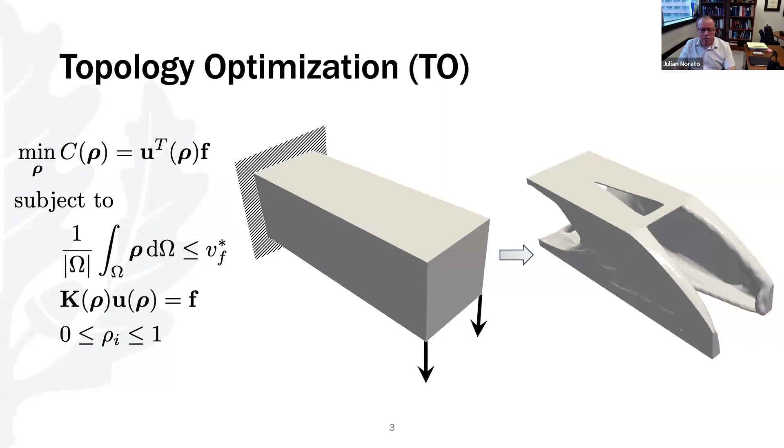I hope most of you are familiar with topology optimization, but if not, it's a set of techniques to optimally distribute material within some prescribed design region. Optimally means in terms of an optimization problem minimizing some function of interest subject to some constraint. Typically, the goal is lightweight design, so one function quantifies the amount of material, and the other is typically a function of structural performance that requires solving a partial differential equation, typically through the finite element method.

Prevalent techniques in topology optimization, most represented in the literature and commercial software, use a field representation. The most popular are density-based methods, with element-wise densities that dictate whether there is material or not in the design, and the level set method, where the boundaries of the structure are given by the zero level set of some function, with values typically associated with nodal values in the finite element mesh. In both cases, we have a field representation discretized using the finite element mesh, so the way we represent the design is tied to the mesh we use for solving the PDE.

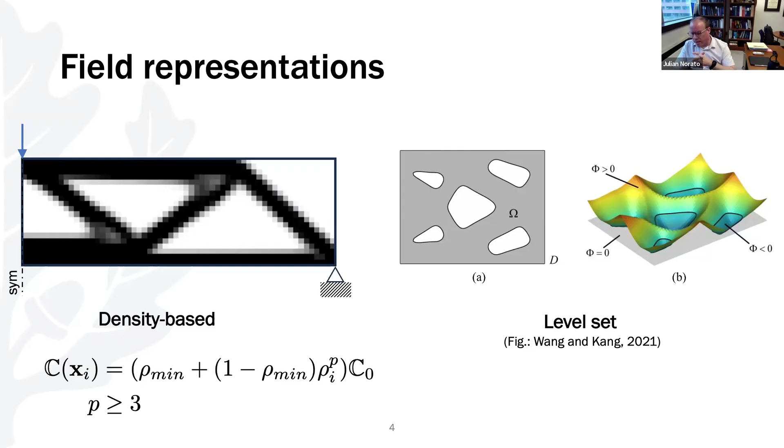Geometry projection, the set of techniques I'll talk about today, is different from these field representations in that the structure is described by a combination of geometric primitives, typically simple ones like a bar. Unlike density-based and level set methods, where design variables are element densities or nodal values of a level set function, in geometry projection the design parameters are geometric parameters directly associated with the dimensions, position, and orientation of these primitives. For instance, for a bar, the design variables could be the positions in space of the endpoints of its axis and its width.

The idea of the geometry projection is to have a differentiable map between these geometric parameters and a field representation like the density representation. We want to create that map because we want to retain the significant advantage that field representations have: any time the design changes, you don't have to remesh or recreate the mesh. That's a huge advantage. We want this mapping to be differentiable because we want to use efficient gradient-based methods for optimization, since those are the ones we use most in structural optimization—they're the most efficient and require the fewest function evaluations.

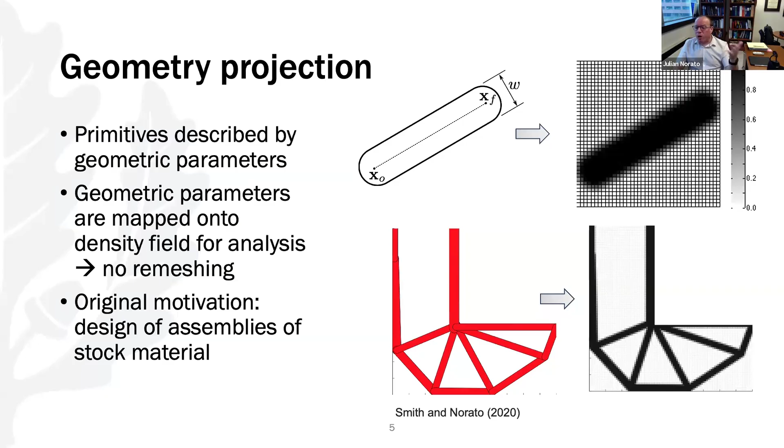The original motivation of these geometry projection techniques, going back to my industry experience, was to design structures made of assemblies of geometric primitives. However, as I'll show today, over time we realized that this representation of the structure opens up quite a bit of other opportunities to solve problems that cannot easily be solved with field representations.

So how does the geometry projection work? We have the parametric representation I mentioned—for instance, the design variables here would be the positions of the endpoints of the axis and the radius of this bar. We also have this membership variable, which I'll talk about more in a minute: essentially, if it is 0, it means we're removing the bar entirely, and if it's 1, the optimizer is telling us we need to keep the bar. To obtain what we call a projected density for one of these primitives, the first thing we do is compute the signed distance from a point to the boundary of the primitive.

For certain geometric representations, what we call an offset solid, all points on the surface of this solid are equidistant from the medial axis. For these kinds of representations, it's very easy and fast to compute the signed distance—we actually have closed form expressions for the signed distance as a function of the geometric parameters.

Once we have that signed distance, we pass it through what is a Heaviside, or smooth regularized Heaviside function, to give us our density. So for instance, if we have a point X such that some window around that point does not intersect the primitive, the density you get is 0. If you have a point inside the primitive, and a window containing that point is entirely contained inside the bar, then the signed distance is larger in magnitude than the radius of that window, so we end up with a density of 1. Finally, if a point's signed distance is smaller in magnitude than the radius of the sampling window, we get an intermediate value of the density.

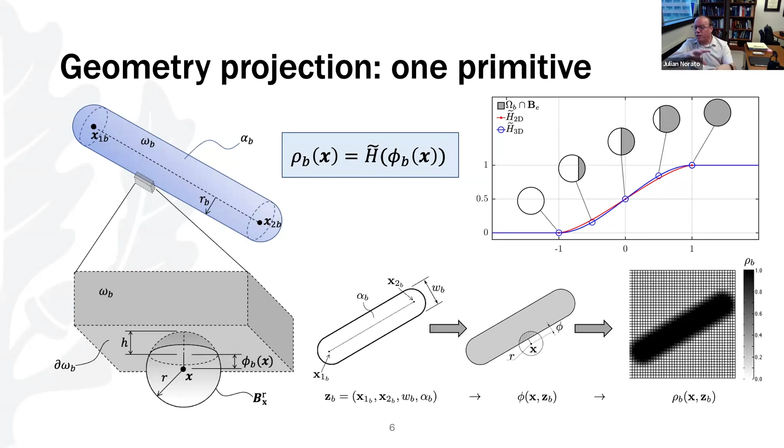Not only that, but the fact that we have a density representation of this primitive means, just like in density-based methods, that this primitive can be completely disconnected from the rest of the structure—and that is fine, because the void region has some small, negligible but non-zero stiffness. So the optimization has the capability of having these primitives float until they end up connected to other parts of the structure during the optimization.

Now, the membership variable I was talking about multiplies the projected density I just described, and then we raise it to a power p. This is very much like the SIMP penalization in density-based methods, and it has exactly the same effect: it penalizes intermediate values of that membership variable. That's because, as you'll see in a minute, we use this effective density to define the material properties, so that regions of the design space with an intermediate value of this density are poor in terms of stiffness-to-weight ratio.

Then the optimization will push these primitives—it'll push these membership variables to be either 0 or 1. That's what the penalization does. This is very advantageous because it means that regardless of the dimensions, position, and orientation of a primitive, the optimizer can remove that primitive simply by making the membership variable 0.

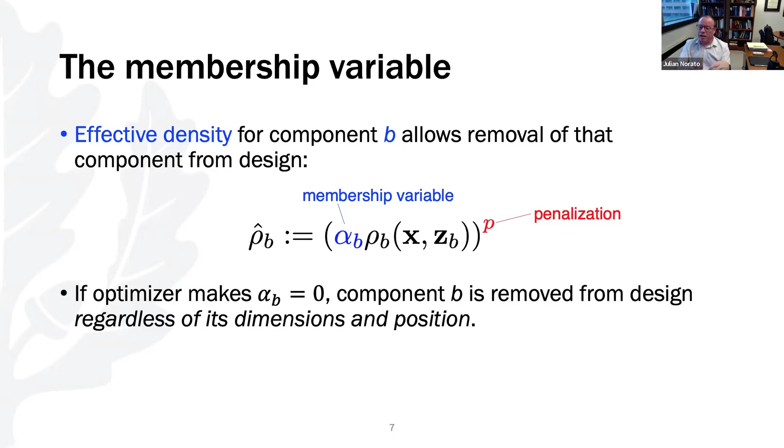This is not possible in the other major technique for feature mapping topology optimization, which is the method of moving morphable components. The MMC does not have this feature. So in MMC, to be able to remove a primitive, it's necessary that that primitive either hides behind another primitive or that it becomes so small that it has no effect on the analysis.

What I just described is for a single primitive. When we have multiple primitives, we can have two situations. One is when all the primitives are made of the same isotropic material. When that is the case, we can combine all of the primitives using a modified p-norm. We take the effective densities for all of the bars or primitives, and the p-norm, as you may recall, is an approximation of the maximum function. So wherever they intersect, you're essentially getting the maximum of all the effective densities of all the bars at that point, which is essentially a Boolean union of solids.

In parts of the design region where there is no primitive, a point that does not intersect any of the primitives will have an effective density of 0 for all of the primitives, so this whole term is 0. You get rho min to the p. If you take the p root, you just get rho min. And so in that way, you essentially have a low stiffness material in the void region.

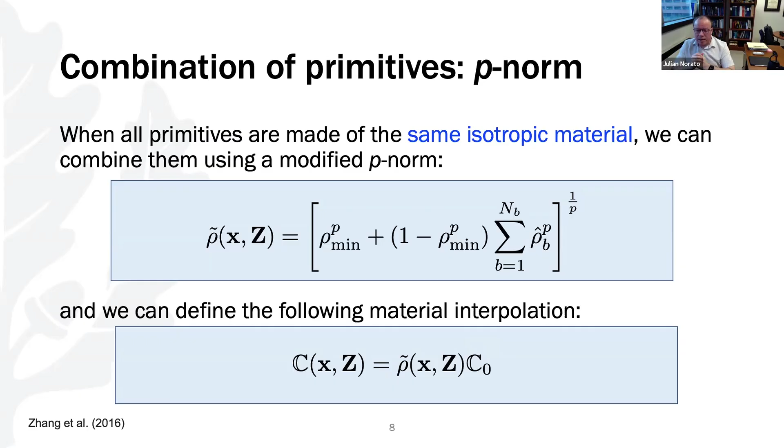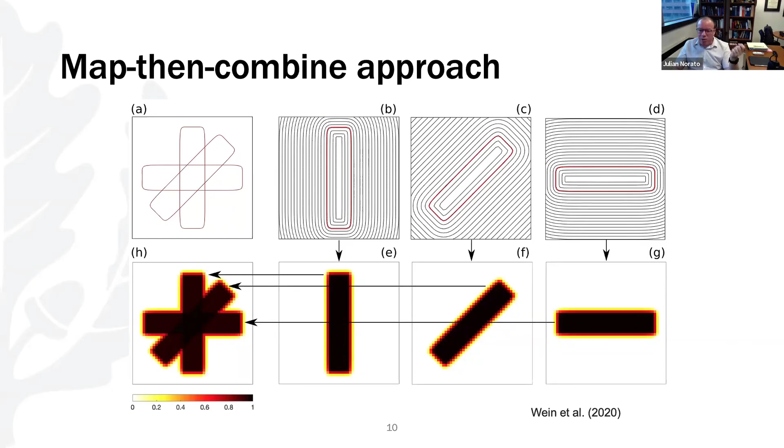The geometry projection is what we called in this review paper a map-then-combine approach, in which first you do the mapping for each one of these primitives, meaning you obtain a density field for each primitive, and then you combine the density fields. The opposite approach, which we call combine-and-map, adopted by the MMC method, is that first all of the primitives are combined into a single geometric representation, and then they are mapped onto the mesh for analysis. In principle, they may look like at the end of the day they'd be the same, but the difference comes from the membership variable I was talking about.

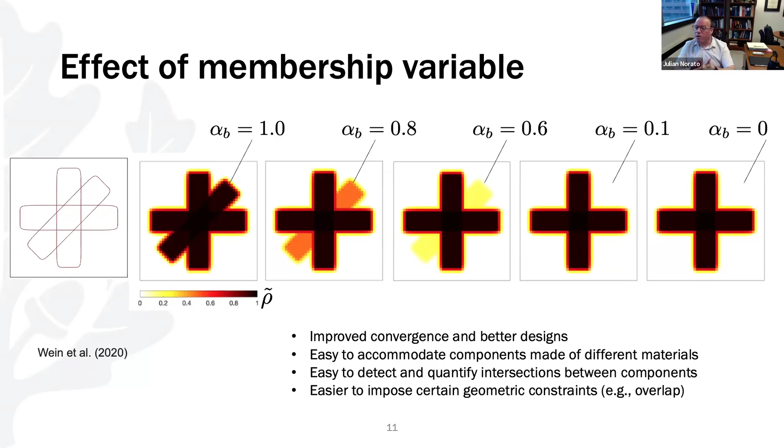As it turns out, it also makes it very easy to accommodate components made of different materials, and we've used it for that purpose - to detect and quantify intersections between components, and we've also done that. And it makes it easier to impose certain geometric constraints. For example, if you want to prevent certain kinds of overlaps, it's easier to do it when you have a separate density field for each one of the bars.

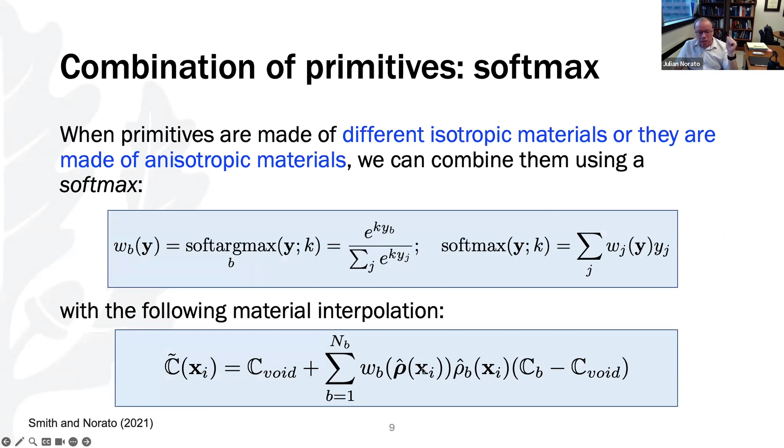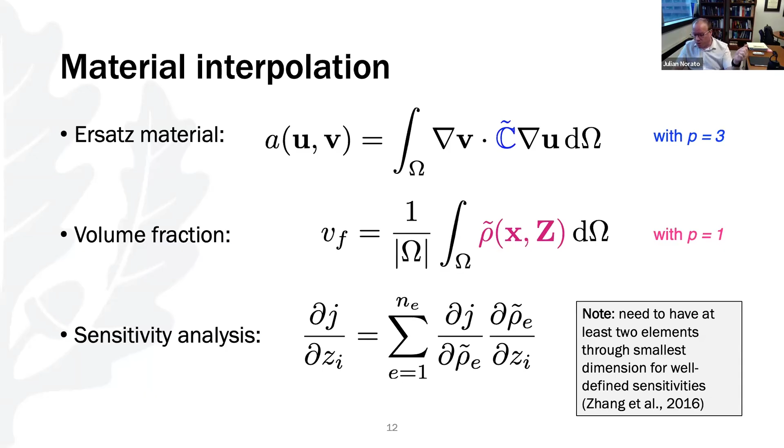We have shown that to be able to have well-defined sensitivities always, it is necessary to have at least two elements through the smallest dimension of the geometric primitive. Not only that, but in general, to correctly capture, for example, the bending of the primitive, it's good to have at least two elements, if not more, through the smallest dimension of the primitive.

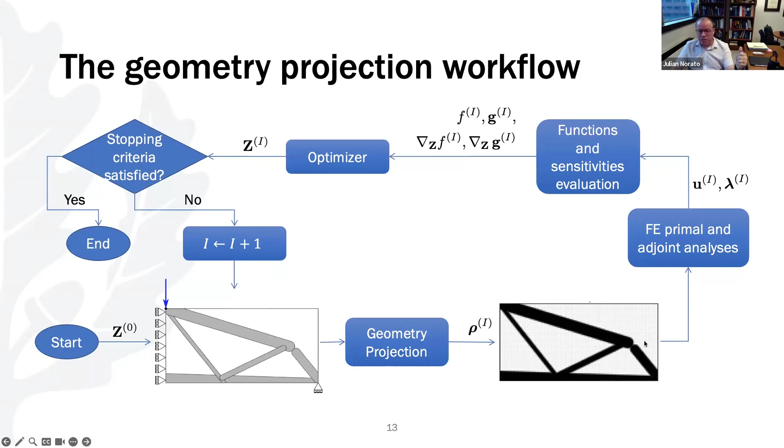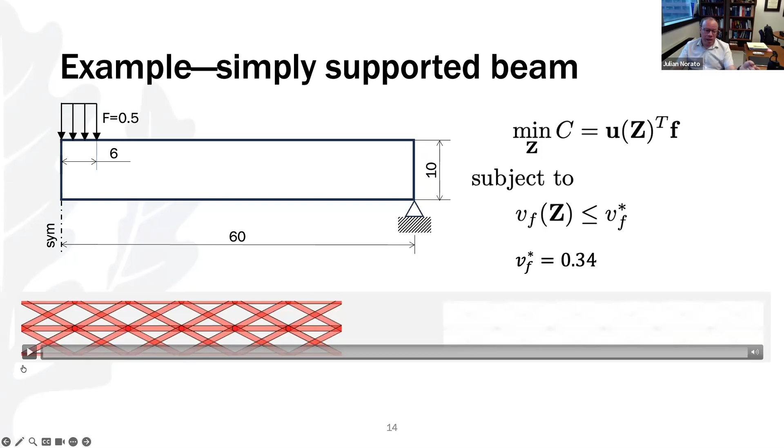And what you see on the right-hand side is the projected, or the combined, density. You see during the optimization that some of the bars are being entirely removed, like this one, for example, it disappears, and this one too. And that's really the advantage of the membership variable.

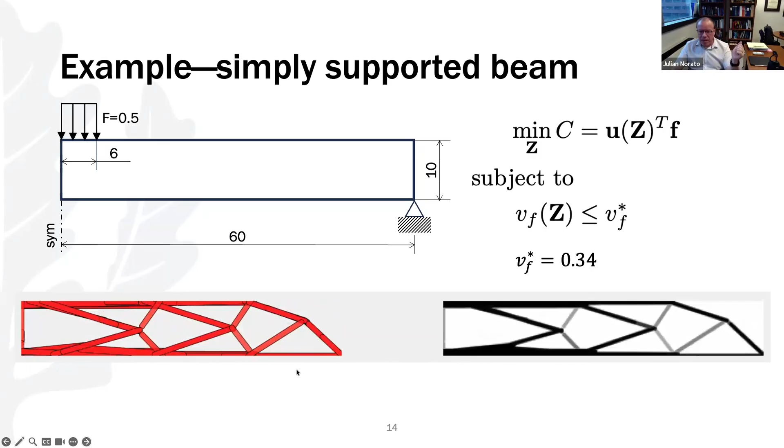So with that, let me get to the application of geometry projection techniques to large-scale problems. Let me preface this by saying that obviously density-based and level set methods have been very, very successful in solving a very wide range of problems in topology optimization. But the problems that I'm going to talk about here are problems for which trying to do the solution with field representations would be very, very expensive. By taking advantage of some of the characteristics of geometry projection methods, we can solve these problems in a much easier way than what would be possible with, say, density-based and level set methods.

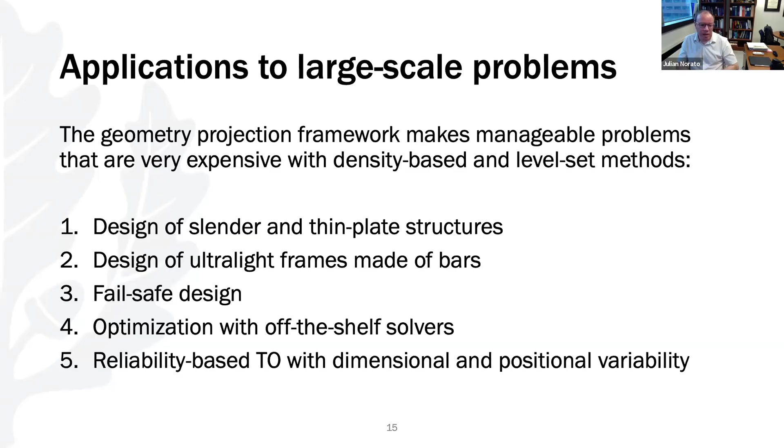So let me start with the design of slender and thin plate structures. One of the first applications that we made of plate structures was actually motivated by my previous industry experience in the heavy machinery industry at Caterpillar, where we were trying to design these structures made of plates. So in this case, the primitives are plates.

And so the initial design looks like this. The plates are just collapsed to a sphere. As the optimization progresses, you see that we obtain a design that is made exclusively of these plates. And this is great, because this looks a lot more like something that we can make out of, let's say, welded plates than what we would get out of density-based topology optimization.

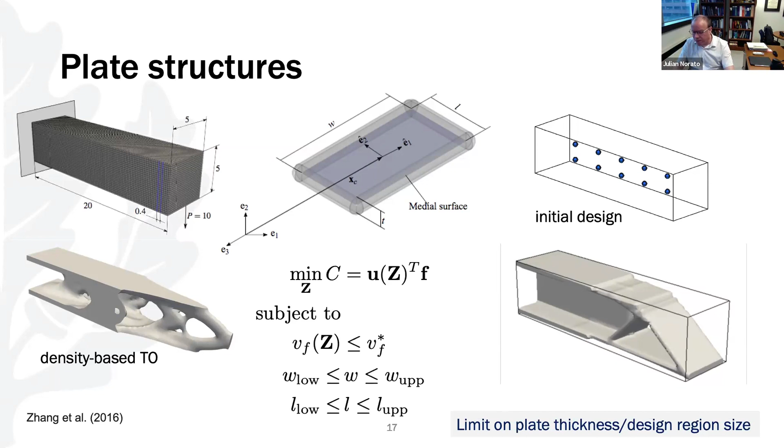However, this still has a limitation, and it is that because we need at least two elements through the thickness of the plate, there is a limit on how thin the plates can be relative to the design region. Because if we have very thin plates relative to the design region, then the number of elements that we would require for the finite element mesh would be huge, and it becomes impractical at some point. So the first solution that we put forward to try to address this problem was using adaptive mesh refinement.

Just like the name says, the idea is to refine the mesh so that it has smaller elements near the boundaries and coarser elements elsewhere.

The advantage of the geometry projection here is that the projected density, or signed distance, provides a very easy way to have a refinement indicator.

So you compute your geometry projection on a coarse mesh, and wherever you have elements that have intermediate values of the projected density, you mark those elements for refinement. Then you do the refinement, and you can repeat that for as many levels as you want.

You again repeat the geometry projection, look at the elements that have intermediate values of the density, mark those for refinement, refine the mesh, and so on.

This is very convenient for two reasons. One is that, unlike common methods to do adaptive mesh refinement which are based on some gradient of the solution and are significantly more involved...

...this is purely based on the geometry. So it's very easy, very quick to do, and it does not require a finite element analysis.

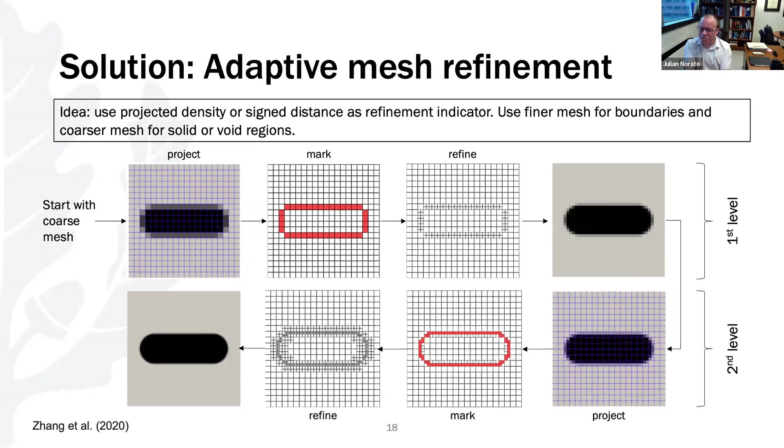Whereas if you were to do something similar in density-based and level set methods, you have to deal with the fact that you're using the mesh to describe your structure, but then you refine it—so essentially you're also changing the description of your structure, and that introduces difficulties.

This is a small example in which we're trying to design a simply supported beam, shown here just so you get a glimpse of how the adaptive mesh refinement is working.

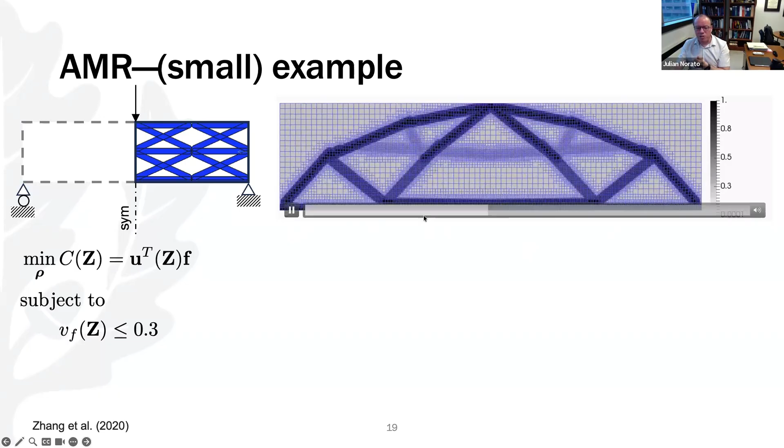The optimization is essentially creating a coarse mesh in the void regions, and this is done at every iteration of the optimization, as you can see—so you repeat the adaptive mesh refinement at every iteration.

The advantage of doing adaptive mesh refinement is, first and foremost, that you need far fewer elements than you would with a uniform size mesh that has the same number of elements through the thickness of the components.

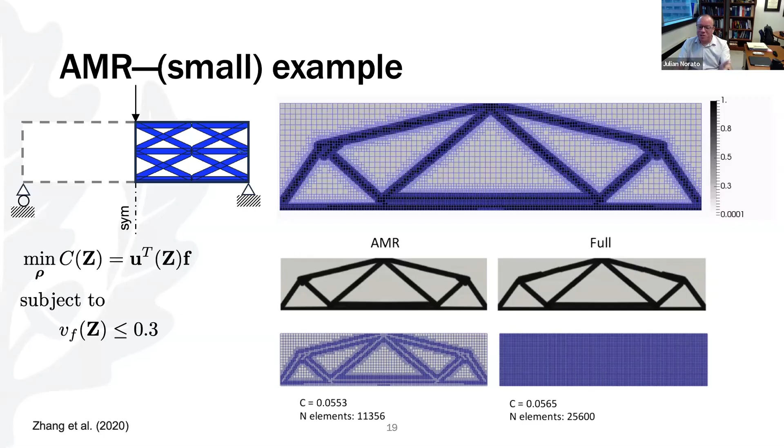So in this example, we actually require less than half the number of elements, and as you know, less than half the number of equations in finite element analysis can be significant for large problems.

For a more practical example with the plates, we have this case where we're trying to design a structure made of thin plates, and again the optimization minimizes compliance subject to a constraint on the volume fraction.

If we were to use a uniform size mesh throughout the optimization for this problem, we would need a mesh that has 18 million elements.

This is so that we can guarantee we always have at least 2 elements through the thinnest thickness of any of the plates.

But with adaptive mesh refinement, in the first iteration we start with 6 million elements, and it goes up to maybe 9 million or so.

Then as the optimization starts converging, we end up with a mesh of less than 4 million elements—so the difference is drastic, of course.

So we can solve this particular problem in 8 hours. Actually, this was quite a few years ago already, so the specs of this machine and the times were for the specifications of that time.

But the point is that we can design this structure that now can start having much thinner plates, and you can see that in some of the plates here relative to the size of the design region.

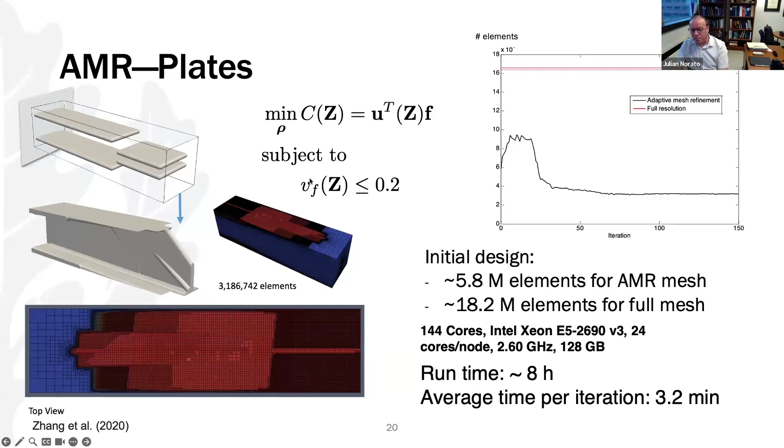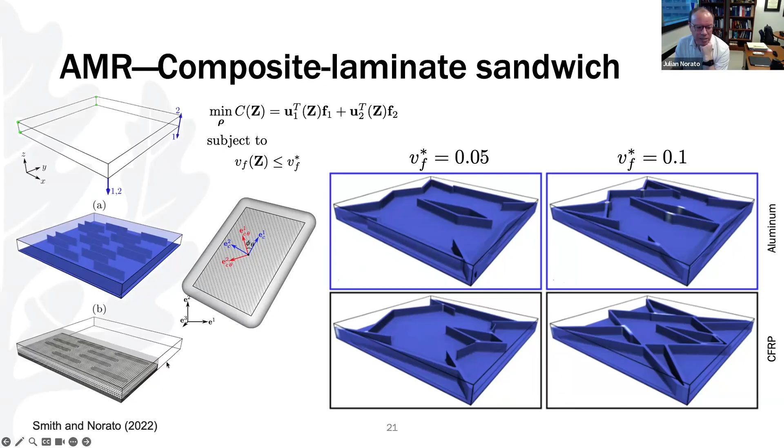And here you can see the adaptive mesh refinement for this problem.

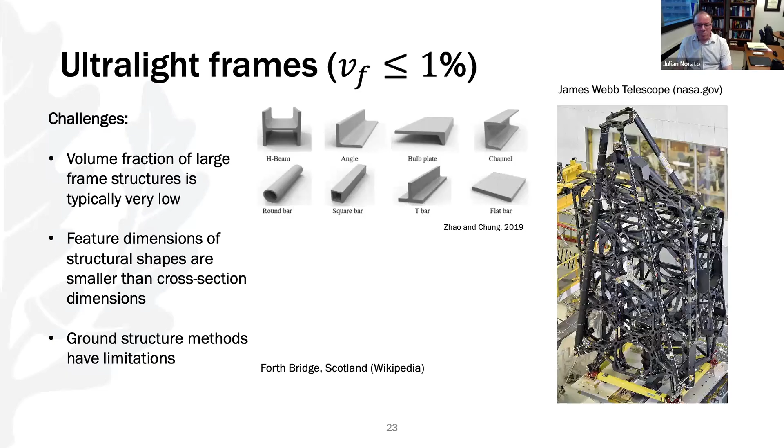There is another strategy we can use for the problem of the structure having a very low volume fraction relative to the design region. We use that in what we call design of ultralight frames made of structural profiles. The goal is to design ultralight frames - maybe a misnomer since many practical truss-like structures are already ultralight. Our definition of ultralight is that the volume fraction relative to the volume of the design region is less than 1%.

Typically, no matter the problem, getting to a volume fraction of less than 1% with density-based and level set methods is tough. You would need a very, very fine mesh. It can be done, but essentially you need a really fine mesh to get very small details. So that's already a challenge - having a relatively low volume fraction relative to the design region.

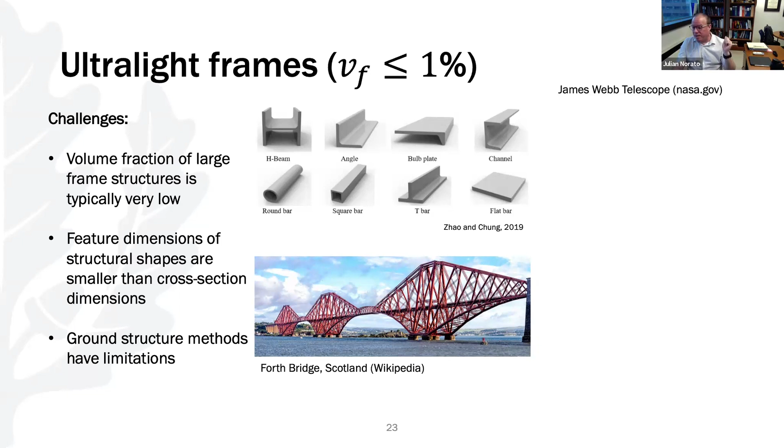But on top of that, if we want to use these structural profiles, we have to take into account that these profiles themselves have relatively small features relative to the dimensions of the profile itself, which makes it even more difficult. Using ground structure methods for these problems is possible, but they have their own challenges in terms of producing suboptimal minima, and removing members from the design is actually quite challenging sometimes in ground structure methods.

So the solution we came up with was to use what we're calling an equivalent section approach. You can think of this - and maybe this is a little heretical - but essentially what we're doing is ultimately a homogenization of sorts, a homogenization of the geometry.

What we're saying is we're going to replace the true cross-section of the structural profile with another rectangular cross-section of larger dimensions that has the same effective stiffness - axial stiffness and bending stiffness. We do that simply by equating the axial stiffness of the two sections, and then the bending stiffness in the weak and strong axis.

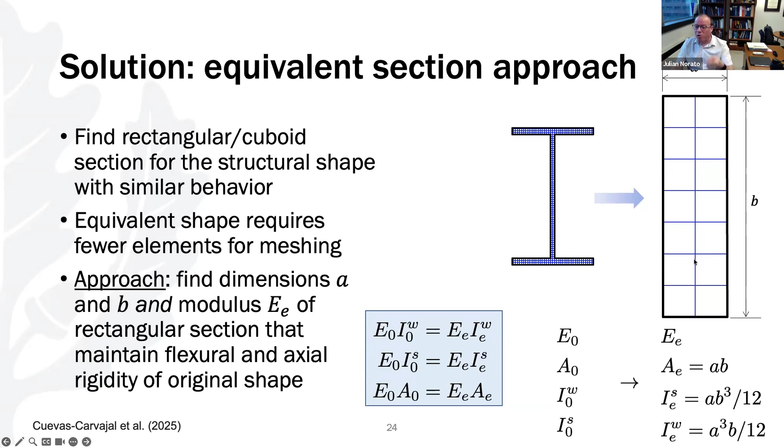You can have any sort of profile here. Your rectangular section would have an equivalent Young's modulus, an equivalent cross-sectional area, and equivalent area moments of inertia in the strong and weak axis. The advantage is that instead of having two elements across a tiny web, for instance in this I-beam, I can have this much larger rectangular cross-section, which requires far fewer equations in the finite element analysis. Note it's not just the dimensions - we're also using a different modulus for this cross-section.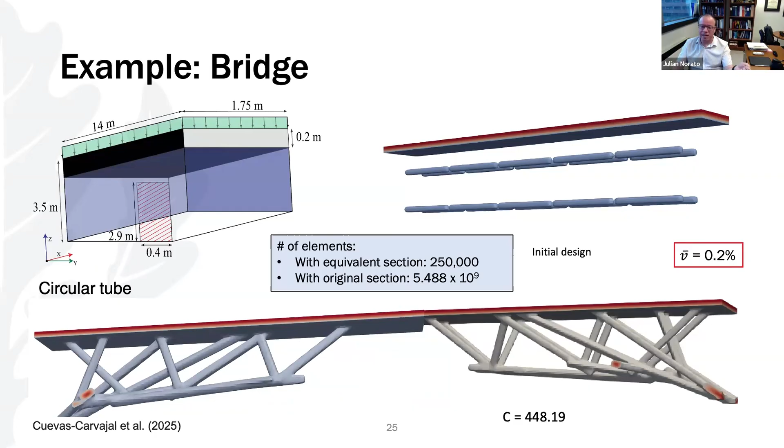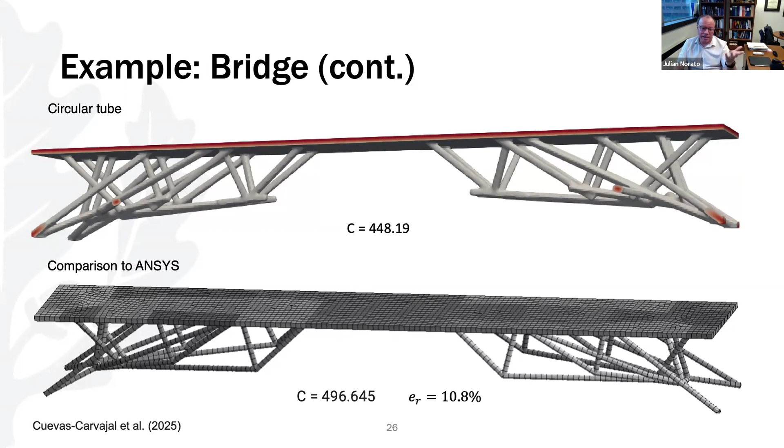This is an example of that bridge design with a similar design verified in ANSYS, and the difference in compliance is about 11%. So obviously there is some modeling error in using this kind of geometric homogenization approach, but I think it does nevertheless very well in terms of producing these designs.

Another instance in which geometry projection can help solve problems that are very expensive with density and level set methods is fail-safe design. Fail-safe design seeks safe operation of the structure if a portion of it is lost - for example, if there is an impact and you lose part of the structure. In topology optimization literature, this is usually posed as a min-max problem.

For example, in the case of compliance, if you lose different portions of the structure and compute the compliance for each case where a portion is lost, you want to make sure that the largest compliance among any of those cases is as small as possible. So it's a min-max problem.

Density-based methods have addressed this problem essentially by removing a patch of elements - making the densities of this patch 0. They solve the analysis, compute the compliance, then move this patch a little. In this paper, the patch is aligned with the element edges, so you'd move it by one element column, make the densities in that patch 0 again, run the analysis, and so on.

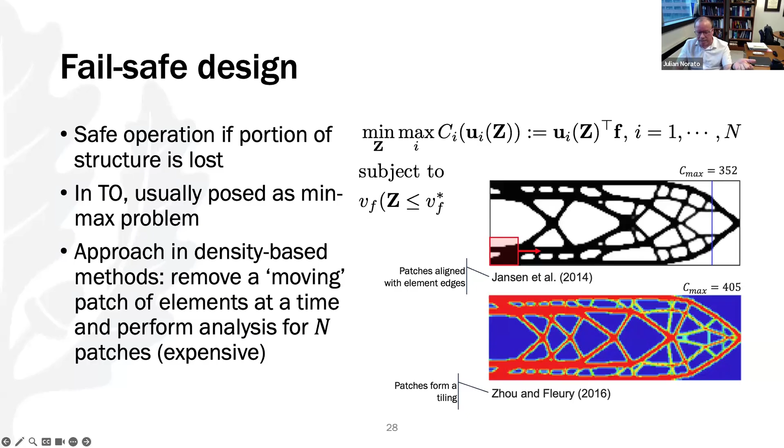In geometry projection, the idea is that if you lose a member, you just remove that member from the mesh. You essentially turn off that structural member from the design. So the number of finite element analyses you have to do in each iteration is just the number of geometric components in the mesh, regardless of the element size in the finite element mesh.

And so we use this unmasking approach, where for each one of the primitives, we make sure that the densities in the region occupied by that primitive are zero, and then we run the analysis. By doing that, for instance, we're able to produce fail-safe designs for three-dimensional problems, which is very, very expensive to do with existing methods for density-based and level set techniques.

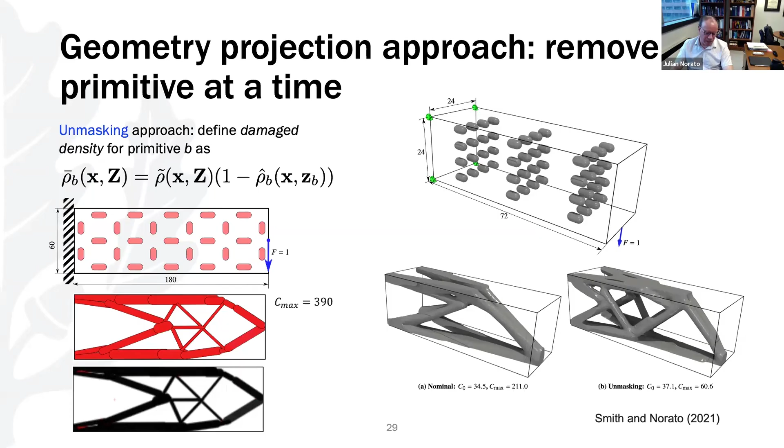Another case in which using geometric primitives can be advantageous in terms of large-scale problems is in the use of off-the-shelf solvers. There are some situations where using off-the-shelf solvers can be advantageous. An off-the-shelf solver typically has a lot of formulation, particularly if it's a commercial tool or software created at one of the national labs or what have you. You have different formulations, and you can handle very complex geometries, and problems where the mesh is made of many different types of elements.

Maybe you have spider elements, maybe a portion of the mesh has two-dimensional elements and another portion has solid elements, what have you. This is a lot easier to handle in off-the-shelf tools than in, let's say, research codes. In geometry projection methods, the fact that we have far fewer design variables, namely the geometric parameters that describe the primitives, means that even though it's expensive, it's still possible to compute the design sensitivities using finite differences.

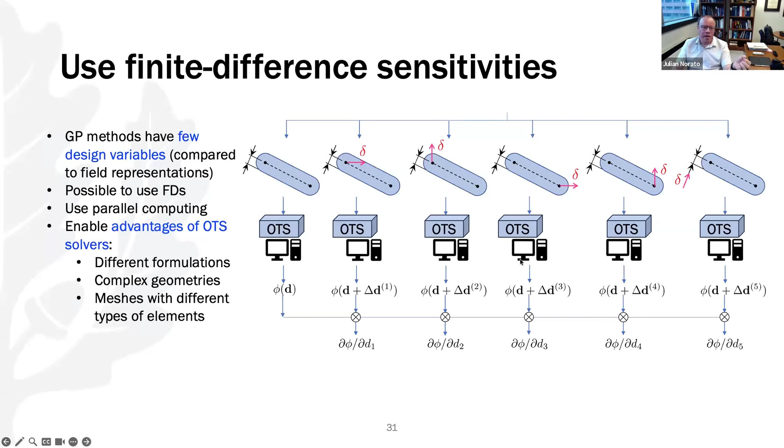You can just use your off-the-shelf solver, do this in parallel, let's say in a high-performance computing system, and get your finite difference sensitivities and run the optimization doing that. Here are two examples of how we've used that. One is in the topology optimization of plate heat exchangers. We have a hot fluid coming through this port and leaving through this port on the other side, and a cold fluid coming through this port and leaving through this other port on the other side.

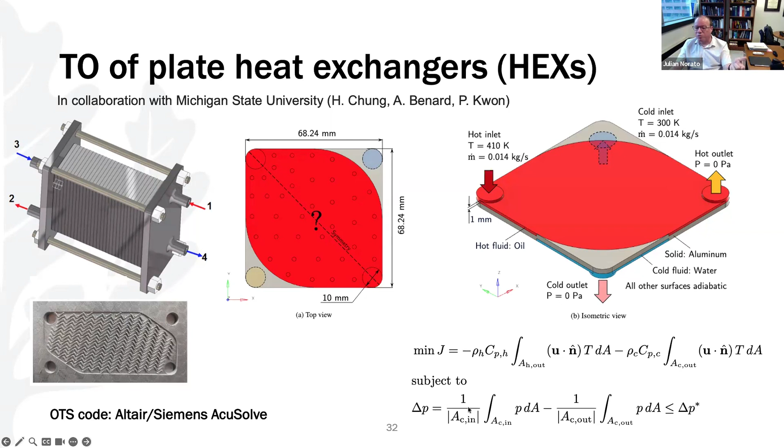The hot fluid goes in between some of the plates and the cold fluid goes in the other plates, so that you have heat transfer from the hot fluid to the plate to the cold fluid on the other side. The goal here is to design these flow structures in the cavities inside each plate to try to maximize the heat transfer, which we compute as the difference in the enthalpies between the outlet ports for the hot and the cold fluids. And then we have a constraint that the pressure drop cannot exceed a prescribed value.

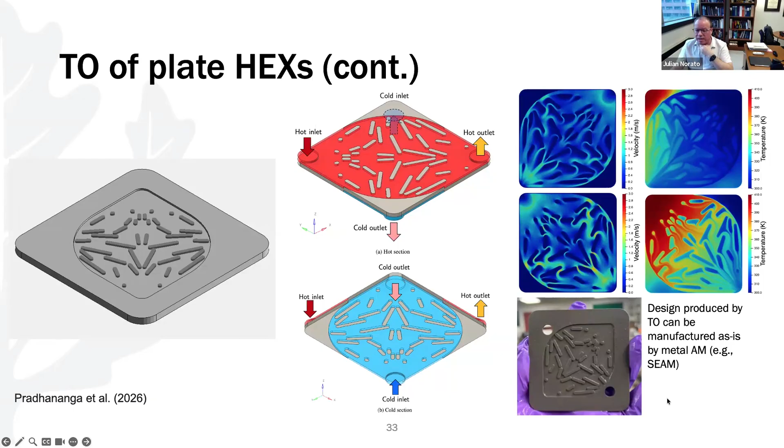This is how the optimization works for this particular problem. We assume symmetry along the diagonal, and also to reduce the number of design variables for which we have to compute sensitivities, we assume the design is the same on both sides, on the cold side and the hot side, but the one on the other side is essentially rotated 90 degrees. In this case, our off-the-shelf solver is AcuSolve, the CFD solver in the Altair Siemens suite. One advantage of this particular method is that the design we get can be fabricated using additive manufacturing techniques very easily, exactly as it comes out of the optimization.

The other example where we've used an off-the-shelf code is for the topology optimization of sandwich panels for energy absorption, and here the off-the-shelf code is LS-DYNA. We have a unit cell, and the design variables describe the layout of these bars in this unit cell. In the analysis, we just repeat this unit cell several times. There are no periodic boundary conditions; we're actually making copies of the unit cell many times, but the design variables describe only one of the unit cells.

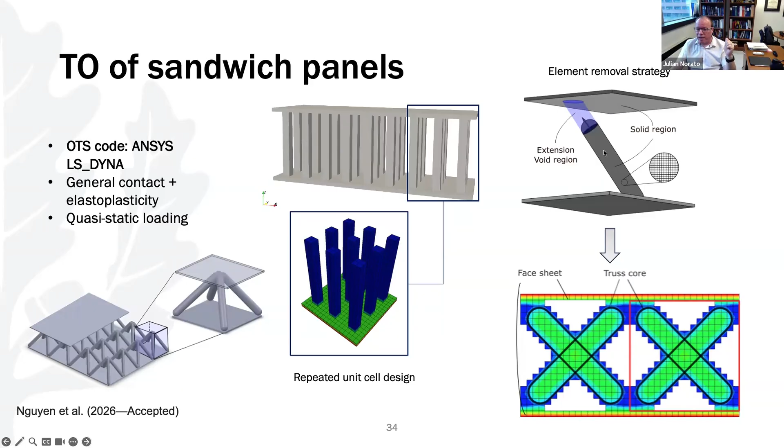And then the other thing that we do is remove elements at each iteration as the design is changing. We remove elements in the void region to make it possible to use general contact and capture contact in between these struts, and to make sure that the structure is always connected to the face sheets of the sandwich panel. We make sure that we don't remove elements in the extension of these struts.

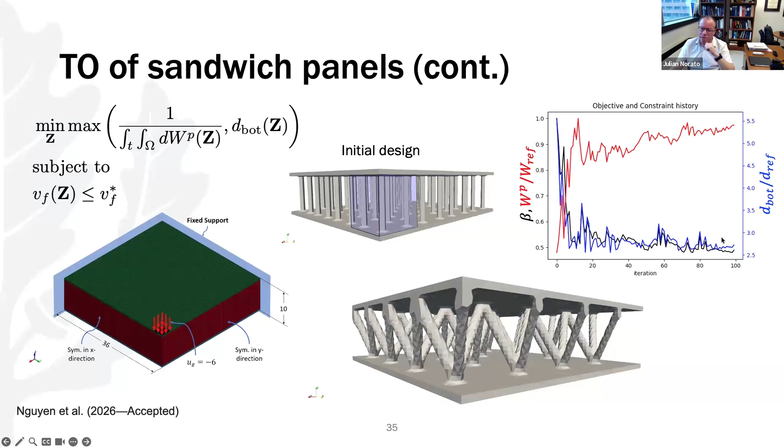So here is an example in which we're trying to simultaneously maximize the plastic work and minimize the displacement at the bottom face sheet of the panel. This is the initial design, and this is the unit cell that we're designing, repeated many times. The optimization modifies the design parameters. At each iteration it calls LSDyna as many times as design variables to compute finite differences, passes those to the optimizer, and repeats the process. We see the optimization is increasing the plastic work and decreasing the displacement at the bottom panel.

Finally, the other example where geometry projection techniques are advantageous for problems too expensive to solve with field representations is reliability-based topology optimization with dimensional and positional variability. Here we want to design assemblies of structural profiles, considering variability in the dimensions of the cross-sections of individual members, and also variability in the positions of those members within the structure, which may arise from the assembly process.

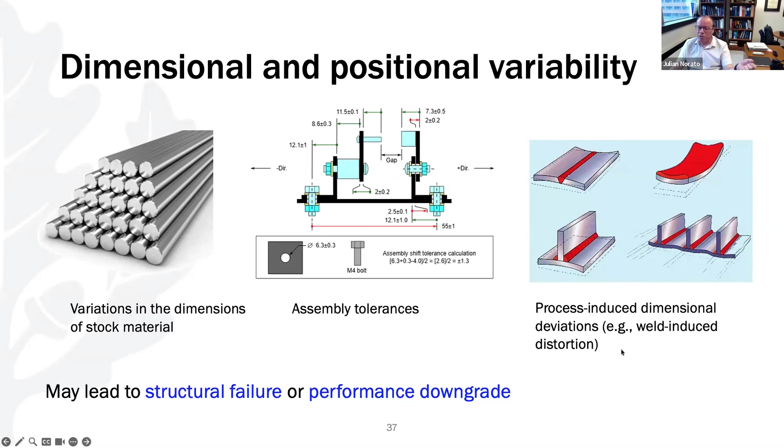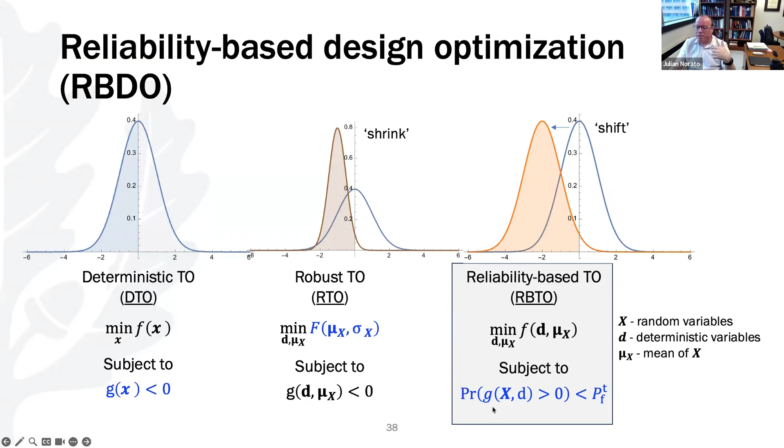For instance, from process-induced dimensional variations caused by welding. We're interested in solving the reliability-based topology optimization problem, in which we minimize, for instance, the weight of the structure subject to a constraint that the probability that some structural measure exceeds some value is... let me be clear: the probability that a failure function is less than some prescribed value, or that the probability of some structural success function is greater than some prescribed probability value.

So here we're essentially thinking about the statistical variability in the dimensions of these components and their position, as I mentioned. The advantage provided by geometry projection techniques is that we have far fewer design parameters than in field representations, which makes it possible to use surrogate models for an accurate prediction of the reliability of the structure. This is really where geometry projection becomes advantageous for this problem.

Also, one advantage of this approach is that the variability in the dimensions of the members relates to actually measurable quantities. You can get a batch of these structural members and quantify the distribution of the dimensions of that stock material, which is not as easy to do with density-based and level set representations.

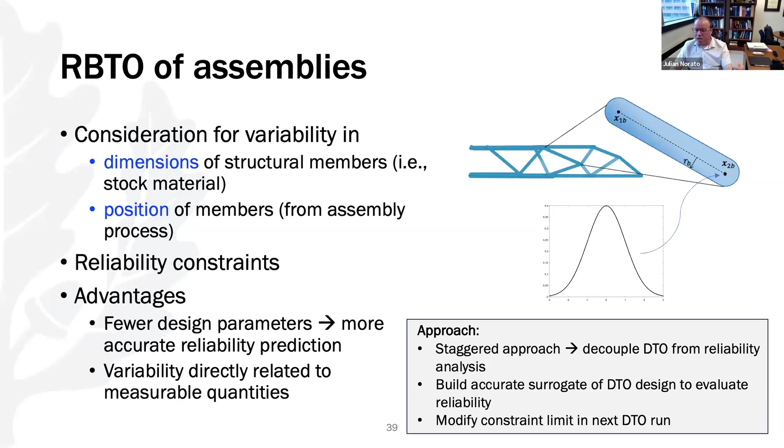So what we do here is a staggered approach where we decouple the deterministic topology optimization from the reliability analysis. We build an accurate surrogate of the design coming out of the deterministic topology optimization, use it to evaluate the reliability, and use that to modify the constraint limit in the next deterministic topology optimization run. So we run a deterministic topology optimization with the limit on the performance function that we want.

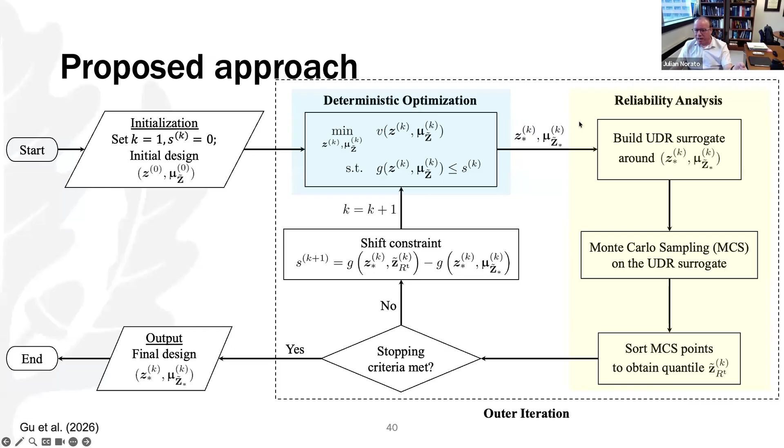This is just plain vanilla regular topology optimization. At the end of it, we build a surrogate of the failure function G around the design—a localized surrogate around the design coming out of the deterministic topology optimization. Once we have that surrogate, which is very quick to evaluate, we use Monte Carlo sampling to figure out the quantile corresponding to the reliability we're seeking, and use that to go back and modify the limit on the constraint. We do this iteratively until some stopping criteria are met.

So here are some examples. This is a compliant mechanism design in 2D. The initial design looks like this, and this is the design we'd obtain using just deterministic topology optimization—it has a very small probability of success, 8.4%. These are the designs we obtain with the proposed method for different values of the target reliability: 84% reliability, 93%, and 97 or 98%.

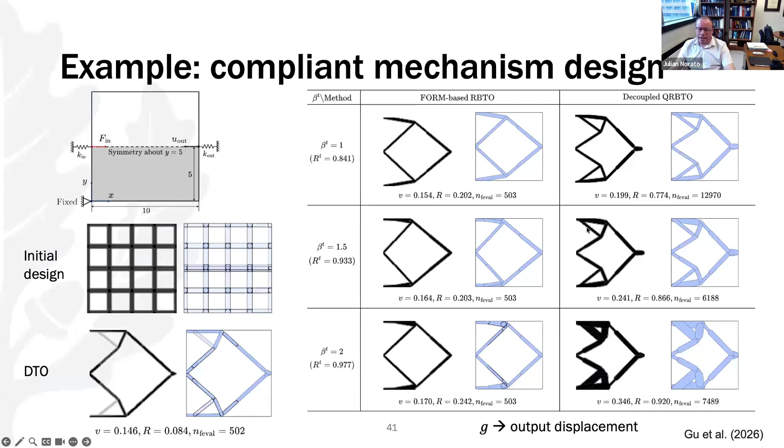And so clearly you see different designs. Notably, we're getting different designs than the ones we get with deterministic topology optimization, but also different from those obtained with other methods, such as those based on the first order reliability method approximation. And they're not only different, but actually quite more reliable than the ones we would obtain with FORM.

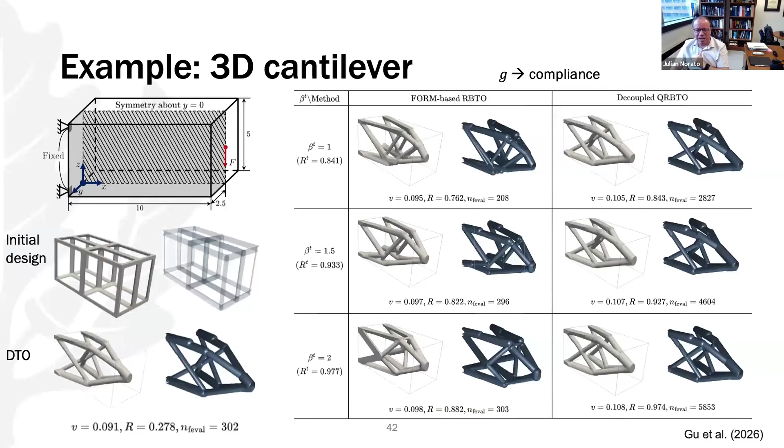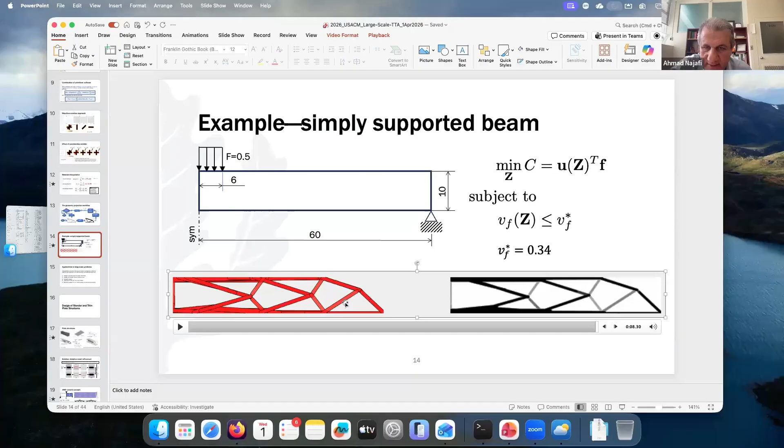So there's a question from Lawrence. It says, in the modified p-norm combination of the primitives, how does the choice of parameter p affect the smoothness of the material distribution, and the tendency of overlapping primitives to behave like a union versus a blended material region?

These approximations of the maximum function are always tricky, I think they solve a problem and give us other problems. You cannot use a value of p that's too high, because then the optimization functions become too nonlinear in the design variables, making it very difficult for the optimizer to do its job. But you cannot use a value too low either, because then it won't do a good job of approximating the maximum. So this requires some level of tuning, and we typically try to choose values of p such that wherever primitives intersect, you get essentially a density of one in the intersections, so you don't get variability toward the boundaries.

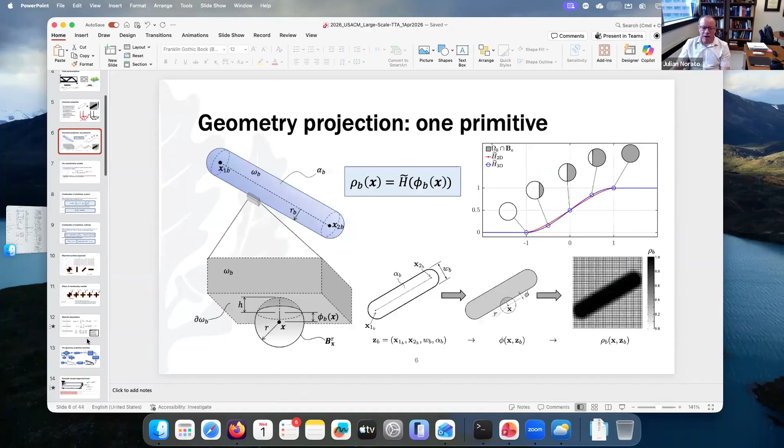I would say that an important thing is that the sharpness of the boundaries in the primitive is not connected to this p-value, because it's given by the radius of the sampling window that we use to compute the geometry projection. So no matter what value of p you use in this combination, the width of the boundaries is always the same. I don't know if this is really answering the question, but I hope at least partially it does.

Lawrence, if you wanted to follow up, please unmute yourself. Otherwise, I will go to the next question.

Ali is asking about the orientation of these members. In lattice structures, orientation plays a crucial role because the majority of the struts should ideally be loaded in tension or compression. How would you determine or optimize the lattice orientation for this purpose?

If we're doing the minimization with respect to compliance, we don't have to do anything. It is natural, because if you want a structure that is as stiff as possible, what the optimizer is going to want is, as much as it can, to have members that are only acting in tension or compression. So we don't have to do anything about it ourselves. There's obviously limitations, right? If your volume fraction is so low that you can really not have a connected structure, then some of the members are going to be in bending. But that's how your optimization problem is defined anyway.

In 2D, it's even easier, because we know that the stiffest designs are made of straight bars. In 3D, the stiffest designs are made of thin plates, but if we use bars, the optimizer still tries to get something that is in tension as much as possible. That depends, however, very much on what your objective function is.

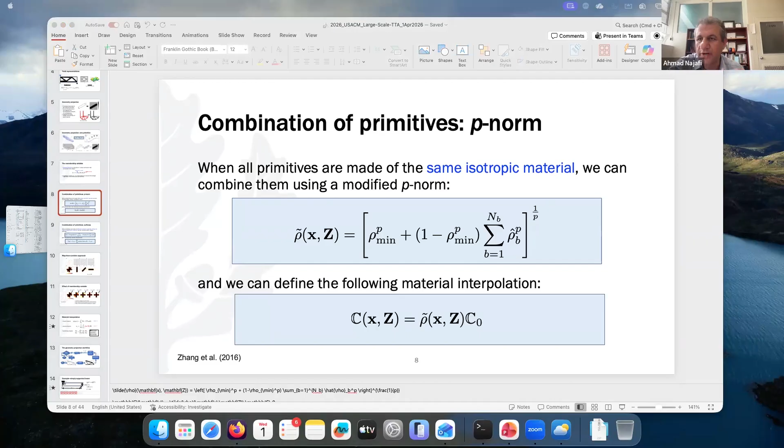In the last 4 minutes that I have, I wanted to ask one more question regarding your experience—not research, but your experience in industry and academia, specifically for our younger students and postdocs in the audience. Could you explain a little about your experience after getting your PhD? You went to industry, worked there, and then went into academia. What is your feeling about both? Please give your honest answer for our audience, since we received this question from people trying to decide which direction to go.

Well, that's a very personal decision, because it depends on a lot of things. Even if you go to industry, your experience can vary widely depending on what job you end up getting. I was very, very fortunate to end up in a group where I could do research. The thing I enjoyed most about the group I worked with was that we could work with the business units to try to solve their problems, and that motivated some of the research and development. It gave me the possibility of having those three aspects: development of tools, solution of practical problems, and research. But that was very unique, and I was, as I said, very lucky in that sense.

If you end up working in a different kind of job in industry, where as a PhD graduate or master's degree graduate you have to work on tough but more individual problems—let's say some system is failing and you have to figure out why—it can be a different experience. I'm not saying it's better or worse, it depends on what you like. I think that's very variable.